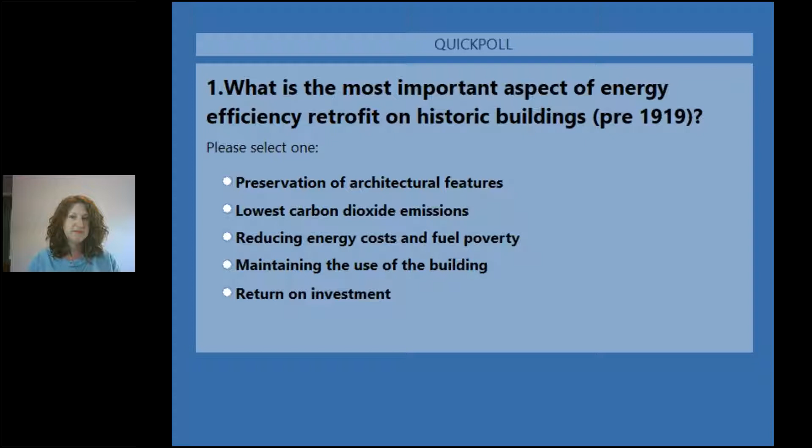And we should be getting the results for that fairly soon. There we go. Right, so you can see there, thank you for everyone that voted. Quite a split. The preservation of architectural features is the highest there, then maintaining the use of the building, and then reducing energy costs and fuel poverty, and return on investment is low. That's an interesting one to see there. I think that's something that depends very much on who's asking that question. So thank you for that.

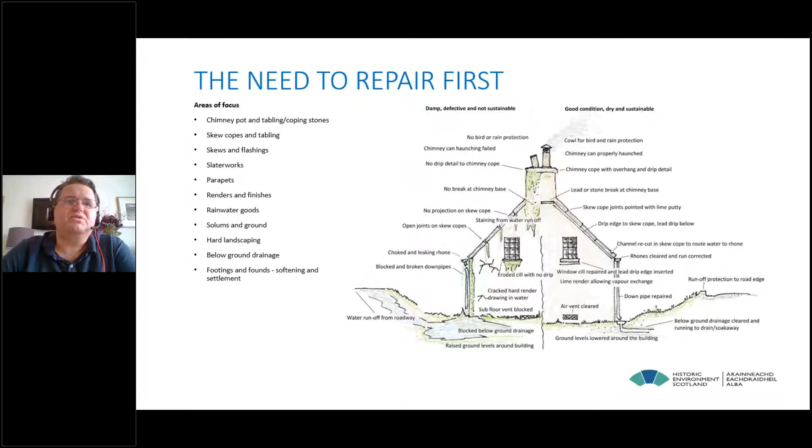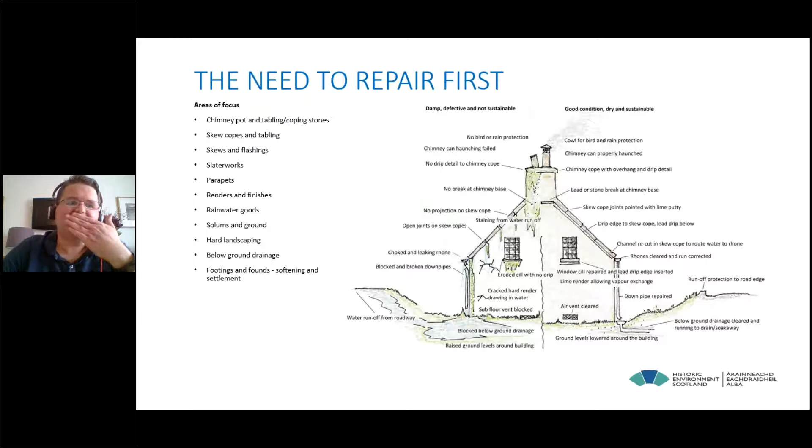So in short, regular maintenance would result in many expensive retrofit projects either not being required at all or saving a really good deal of money in those that are undertaken. So the takeaway from the talk today is to ensure that you deal with these issues before any thermal upgrading of the fabric takes place. And repairing and restoring the envelope is the first step in any retrofit project. And we'll just start by going down the areas of focus on the list on the left-hand side.

So chimneys. Chimneys are generally the most exposed element of a building, and by their nature, they're typically hard to access. Consequently, they're often neglected. Not only are chimneys exposed to wind and rain, but flue gases and combustion products deposited within the masonry over decades of time can accelerate the decay of the stonework or the brickwork. And this is exacerbated, particularly if the flues are no longer in use.

Now, the chimney cans, if you look at the image on the left-hand side, you'll see that the haunching washes out, it becomes cracked, pots become loose. Now, this is not only dangerous, but it's something that probably needs to be fixed fairly urgently. And you walk around Edinburgh and you look up and see some of these chimneys, and you just know from looking at them whether they're in a particularly great condition or not. You can see bits where things are growing out of them.

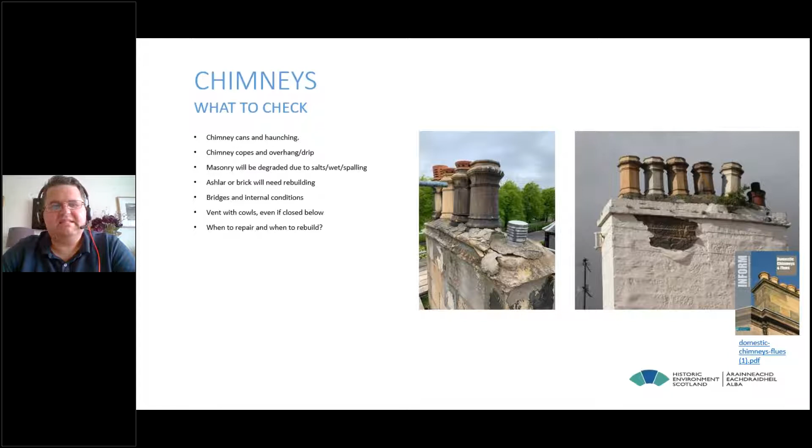So an important thing to look out for in these is the chimney copes. Is there enough of an overhang or drip? Is the masonry degraded due to salts, wetness, spalling? Does it need rebuilding? In any case, it's likely a chimney will need rebuilt every 100 years or so, but it's a problem area, and this is really the first thing when you approach a building, looking from the top down.

As we come down the building, you'll see things like skew copes. Now, these also face a high level of exposure. They're hard to access. Defects can go unnoticed, and if left unattended, these can often become critical.

These are there to protect the wall, the head of the wall. And if these don't work, then these can lead to progressive saturation of the gables, resulting in damage to the interiors as well as the exterior. But this also has a big impact on the thermal performance of the building. As we mentioned earlier, if the wall is wet, it's not going to perform as well thermally.

So there's a number of measures that are outlined there that can be used. You can cloak or half cloak the skew cope. Now, that's an option, but in my opinion, it does detract from the appearance slightly. In some cases, the skew copes can be rebedded onto a lead damp-proof course, and it provides extra protection against water ingress. Now, if this approach is taken, the copes will need to be secured in place with additional fixings to avoid slippage, and the edges of the damp-proof courses should really extend out by about 2 inches or so, just to give a good drip there to shed water.

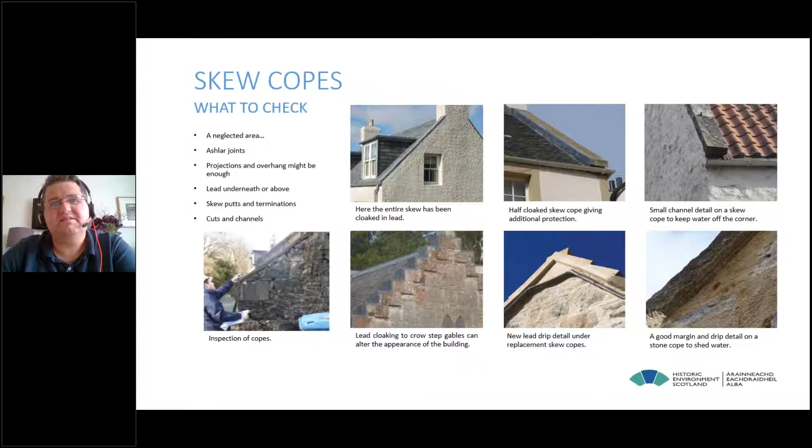But in many cases, just a good margin and a drip detail to shed the water is enough, and that's probably a preferable solution. And then we sort of come on to these parts of buildings, the parapet gutters. Now, these are a great trap for debris to build up. They're tricky to detail, and they do need a wee bit of thought. These can cause massive problems if left alone. So it's really important to regularly inspect them, clear them out.

So you see on the left-hand side, the image, there's ponding, there's a slate sitting in the gutter. It's clearly not been looked after for a while. Now, the intervention on the right-hand side was to install a new stainless steel gutter. The lead work was carried over the parapet, and a guard was installed over the outlet to stop debris falling down the pipe. But that's the repair if it's sorted, but if it's not looked after, these problems will come back again.

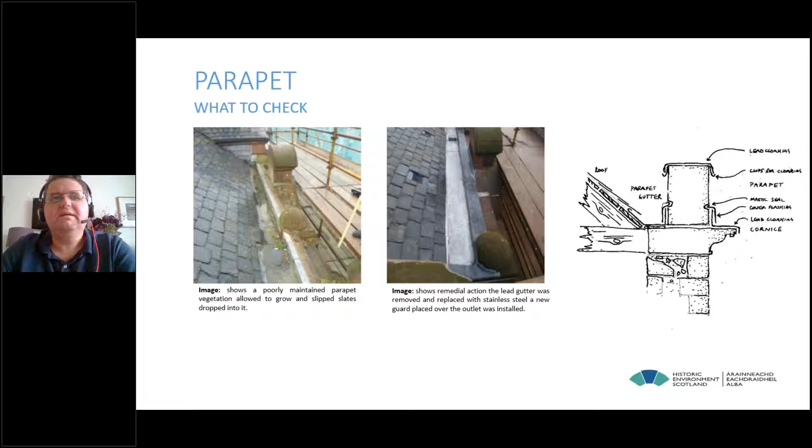And sort of moving down the building, we're onto roofs where many Scottish buildings have got roofs that are covered in a local stone or slate. Now, these small, thick Scottish slates were produced from a range of local quarries across Scotland. The material was processed and produced in a variety of lengths and widths, and it was laid in diminishing courses, with the larger slates at the bottom of the roof, diminishing to smaller slates towards the top.

Now, slates have got a finite life, but we know that this is a really robust material. The material will last for well over 100 years, which is quite common, depending on the type of slate and the quality of fixings and how the material has been laid. So we really are reliant on the craftspeople to help us understand these roofs. But similarly, regular repair is the best way to ensure that roof coverings will remain watertight and continue to perform well. So what you really want to be checking is damaged, loose, missing slates.

The amount of water that can enter by a single missing slate is fairly limited, but it's the problems of the local decay of the sarking board that follow that will lead to further loss of slates. So generally an annual inspection and repair is sufficient. Other things to do is just check the flashings are clear of debris, valley gutters and things like that. There's no bits of slate or cement in there.

Go into the roof space, check the fixings. Are they in good condition? Is there condensation on them? Is there moisture in the back of the sarking? Check for leaks in the roof. It may not be obvious from looking outside where there's problems, but if you go into the roof space, you'll get a better idea.

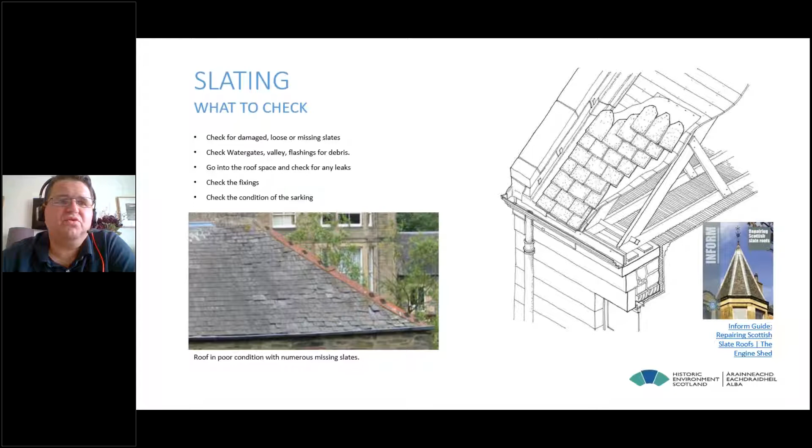And it simply just does come to a point. You'll see from the image there where there's quite a number of missing slates, and you might find that fixing these individual slates is no longer cost effective, so reslating may be required. Now, as a general rule, if you're talking more than 20-25% of slates are cracked, broken, or missing, it may be more practical to just strip and re-roof the building. And I would suggest using an NFRC approved roofing contractor if you're going to go down this route.

But there's something quite beautiful about a slate roof. I much prefer the lively tones of a traditional Scottish roof than the modern homogeneous roofing slates that we are importing today. We've got plenty of these roofs around, but they are being lost at a fairly substantial rate. The material hasn't been produced in Scotland since the 1960s, so we are relying on imported material, which, to me, just doesn't have the same appearance. It's not quite as rough or as lively.

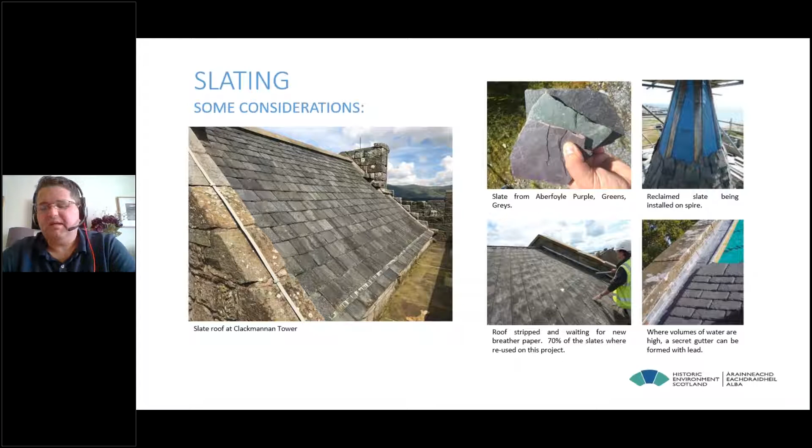So for us, the best way to maintain and preserve these roofs is just regular maintenance, again, a sort of annual check. You just go up and have a look at your roof through binoculars, and bring somebody out to repair it.

We get on to rhones and gutters, and these are a really important part of the building because they're the thing that carries rainwater from the roof, ensuring that the wall fabric remains dry. If they get blocked, they can cause a huge amount of problems with high volumes of water saturating the building fabric. Now, this is a serious matter. If not addressed promptly, it will result in damage to the masonry and finishes.

And it's one thing that I've noticed. If you go in any town centre or city centre, you look up and you see gutters with plants growing out of them, with walls that are saturated or stained, and it astounds me because you don't need to be a heritage or construction professional to know that plants shouldn't be growing out of gutters and water shouldn't be streaming out of walls just because the gutters are blocked. It's simple stuff.

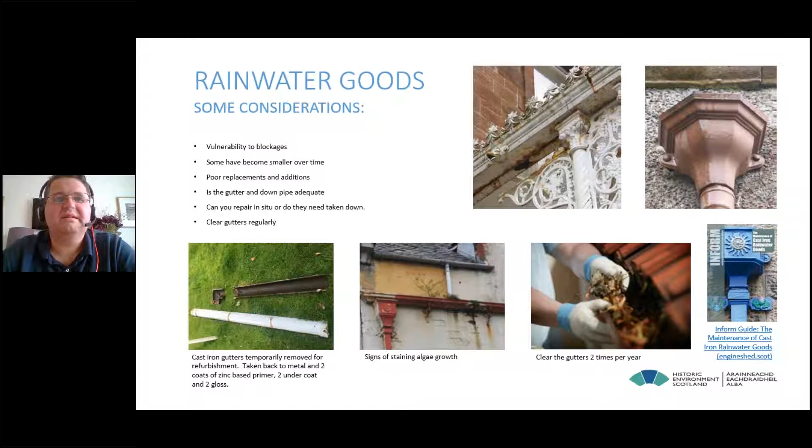Poorly maintained buildings are vulnerable to damp problems. However, with correct maintenance, repair and adequate ventilation, traditional buildings can be kept dry and healthy. You look at the image there, you might think that's a huge job to keep this wall dry. You've got your wind-driven rain to deal with, and then you've got the inside water loads of your showering, your washing and the vapor that we produce ourselves. So you've just got to accept that moisture is part of managing an existing building.

And how we manage the movement of moisture out of the building and out of the walls is particularly important. So we've got to ensure that the materials that are there can breathe. They allow for water to be absorbed and then released. So any intervention here really needs to be thought through, as it will impact the point that moisture condenses within the wall buildup. So I would advocate a really good understanding of how these walls work as a necessity before undertaking any retrofit measures.

If, for example, you install a layer of insulation on the back of that masonry wall, it will make the back of that masonry wall colder, which will bring the dew point further into the wall, which can cause further problems. But to address any damp problem, the source of moisture must first be identified and addressed before any interventions are considered. A lot of the work that I've done has simply been removing cement render or cement pointing from stone buildings and replacing it with lime.

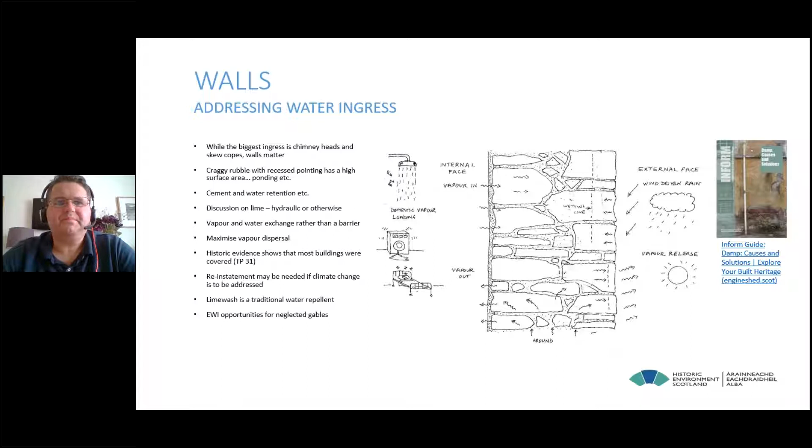And the other thing I would advocate is like-for-like repairs. So anything you're doing to a stone wall, you need to make sure that the materials are compatible with what's already there. And we'll touch on that a wee bit later on. And that kind of brings the question that we've been thinking about: to harl or not to harl. There's a lot of evidence to suggest that there was a lot more masonry harled traditionally than maybe we would think.

But lime harl and lime washing makes these buildings much more resilient to extreme weather. But how do you balance that practical solution with the fact that you're fundamentally changing the appearance of the building by installing a lime harl on a stone building? A lot of buildings maybe had this harl and it just became fashion. Stone became more fashionable. So it begs the question: do we need to go back to lime harling?

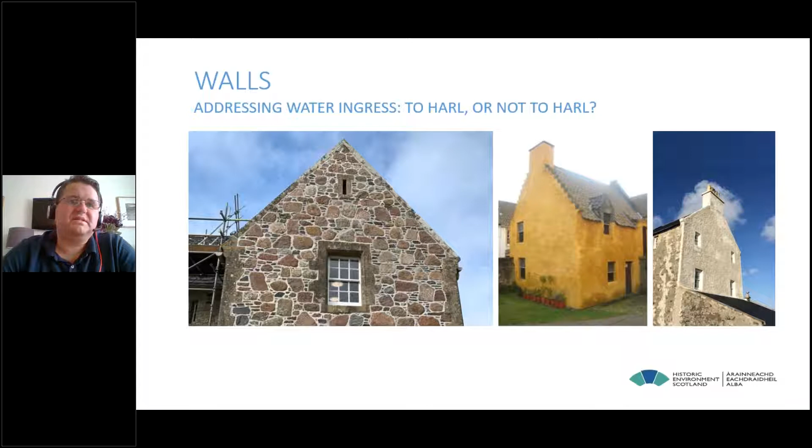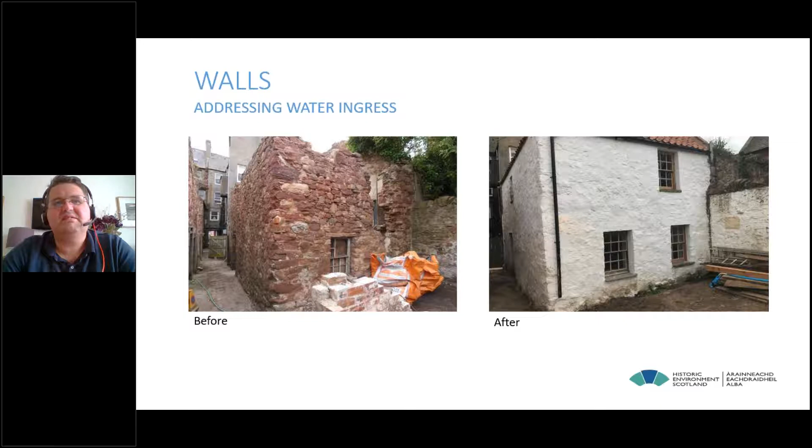If it makes the building more durable, it enhances the building visually, then perhaps why not? It's a technical solution. If it keeps our walls dry and it ensures the survival of the building, maybe we should consider it. And this is just an example. It's the same issue with building stone. Maybe this isn't a particularly attractive stone building, but I don't think the lime harl detracts from the appearance. I think it actually enhances it, and it's also offering a greater degree of protection.

We're starting to get our way down to the very bottom of the buildings, and you'll see a lot of traditionally constructed buildings have got timber floors and they rely on a vented solum. It's very important to make sure that there's adequate air movement beneath these floors, just to disperse water. And I've come across this in projects where I've seen so many of these vents covered, or the ground has been taken right up to them, which isn't ideal. So I think it's important to think about the ground level: has it been adapted? Should it be reduced? It may be practical to install a French drain there just to allow a wee bit more drainage to move moisture away.

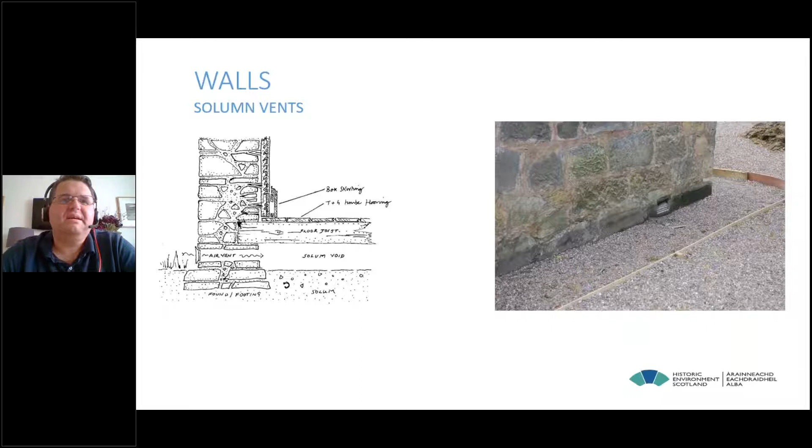And this one's pretty self-explanatory: below ground drainage, make sure your drains are clear. This is one thing that we probably do neglect. It's worth making sure that if you do see problems like you see in the image there, there's something going on, and you maybe do need to think about investigating it further.

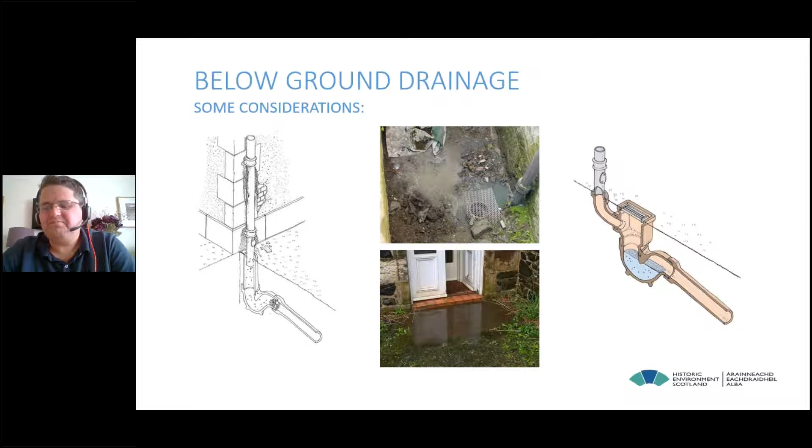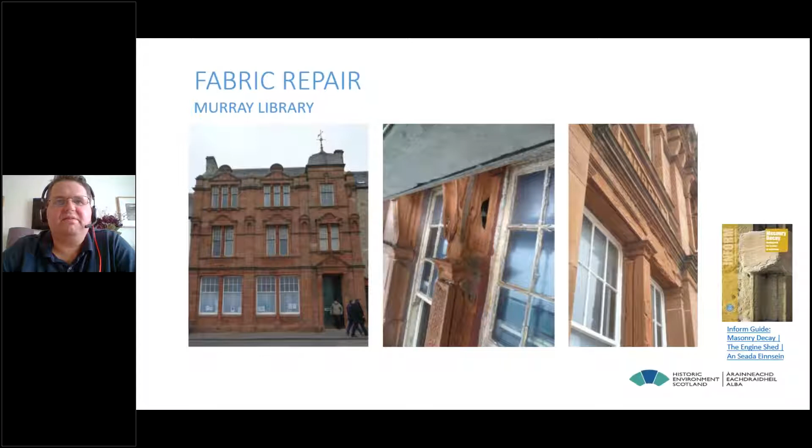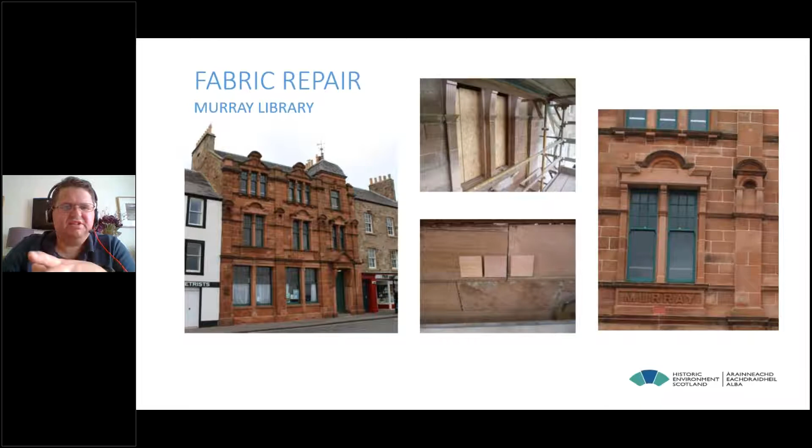Obviously, there's a risk that some of the stone could delaminate and fall onto the public, which is something that we had to fix. So, we had to repair the masonry. The approach was we brought in the British Geological Survey to take a sample of the existing masonry away and do a petrographic analysis. They provided us with a couple of potential solutions, and I think it was Corncockle or Locharbriggs that was used in the end, and you'll see in the image on the left-hand side the interventions are fairly clear to see.

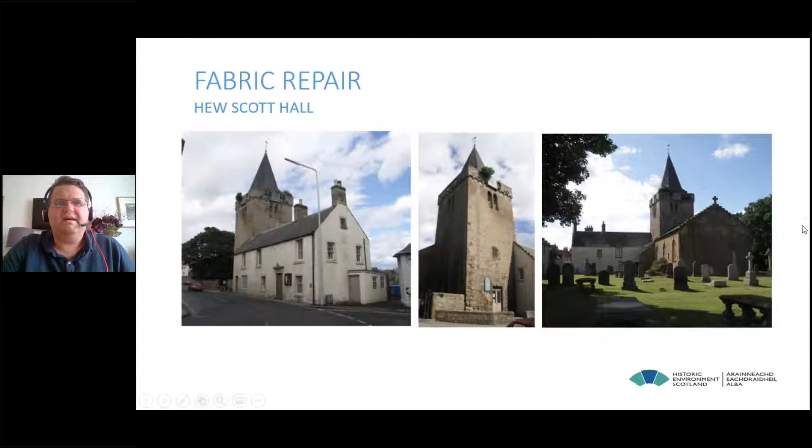This is a straightforward fabric repair of a project I worked on in Anstruther as well.

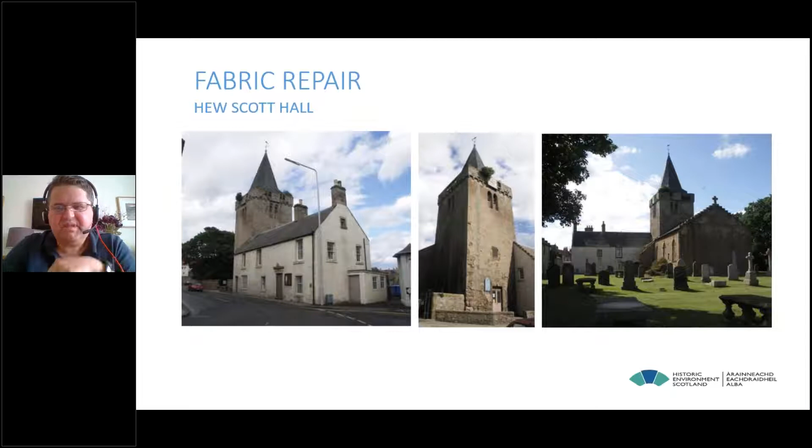It's a few years old, and it was in a particularly poor state of disrepair. There are several issues that maybe aren't quite clear. You can see from the medieval tower there's a tree growing out of it, and the parapet - the harling - is in fairly poor condition there. The town hall on the image on the left has got a cement render on it, and the roof was in fairly poor condition. So the further we went up the building, the more and more problems we got to see, which was because it was more exposed, I suppose.

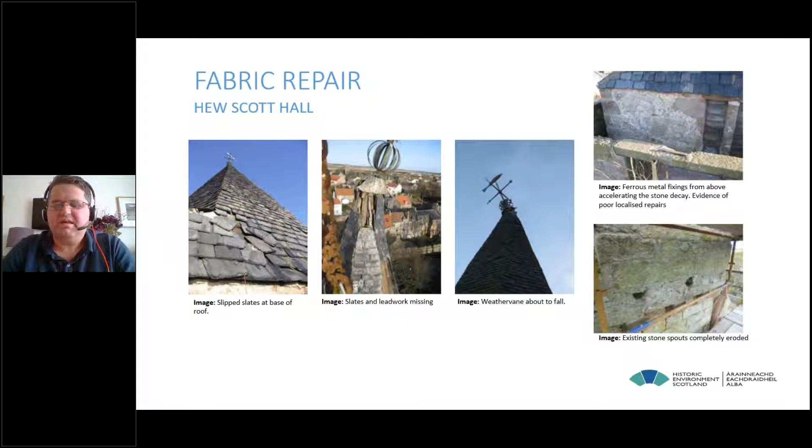What we had to do as part of this sort of 100-year repair was to clear the parapet, basically take it down, install new stone spouts, and rebuild it again. The cap house was given a lime harl, and several coats of lime wash, and that's the finished building on the finished parapet on the right-hand side. That intervention will help that building shed water. It deals with the defects of the eroded stone spouts, and that's it today.

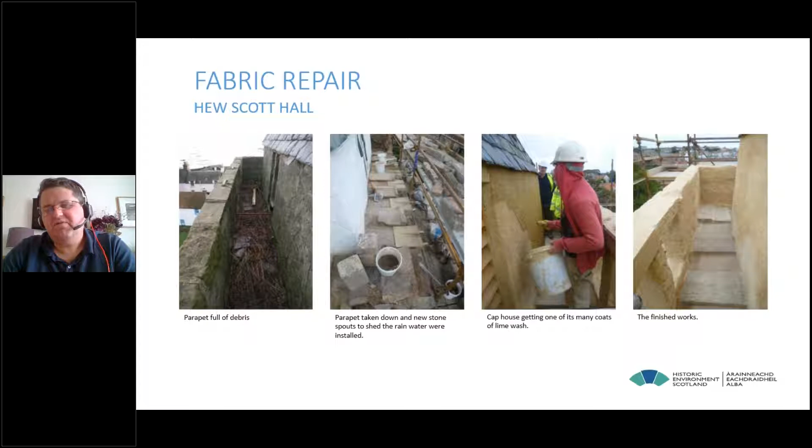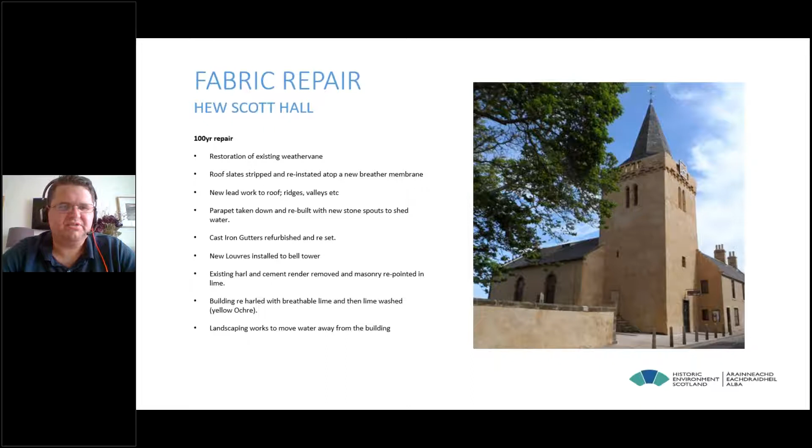This is your typical 100-year repair where that's what we had to do. So that building now, I would argue, is ready for a retrofit. You've dealt with the problems of the fabric, now you're ready to do a more deep retrofit on it.

I'll just be aware of time. How am I for time? Just two minutes left, Graham. Thank you, okay, okay.

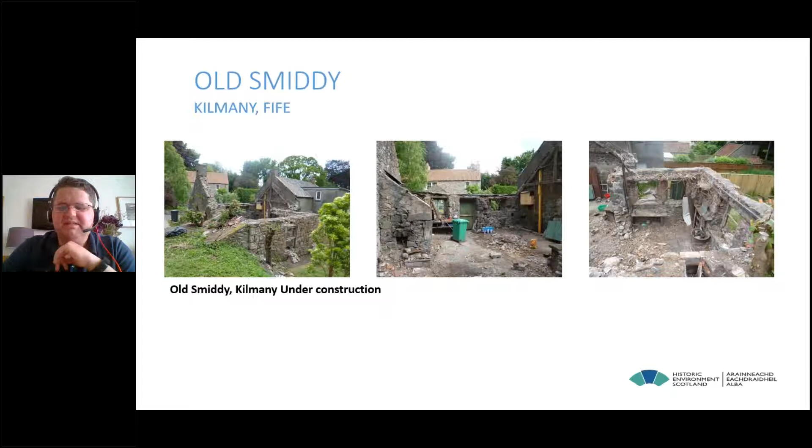The roof had to be taken off, but this gave us an opportunity to do a more deep and considered retrofit. We were back to sort of the very basics of the building, and that's it today - so it's now a home for somebody.

So I'm just going to run through very quickly the last slides. Careful, proportionate details, compatible in scale and craft to existing work, enhancement of performance, use an established palette of materials and techniques. Solutions in a tin are not our thing - each building is assessed on its merit. Listed building consideration, changes implicit in the listed building process, and reinstatement of traditional finishes.

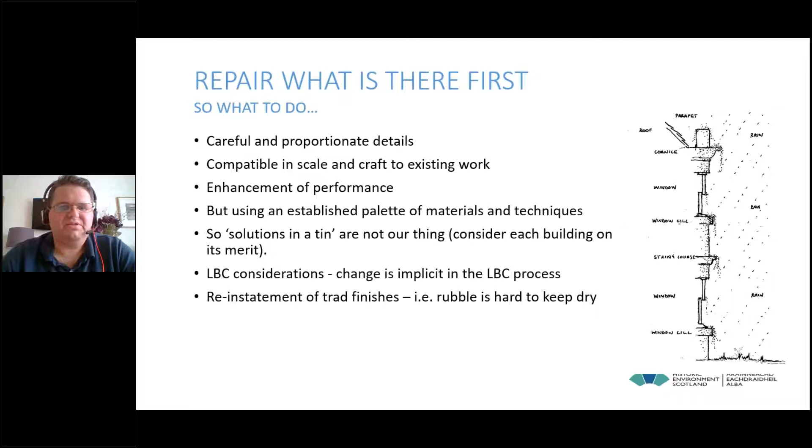Rubble's hard to keep dry - maybe think about what we can do there.

And it's just really my final thought. Most of us will have different job roles throughout our career, and I would imagine that most architectural technologists at some point in their career will encounter working with an existing building, either adapting it or extending it. I think architectural technologists are well placed to play a leading role in retrofitting traditional buildings, but we have to look at the buildings differently. These need to be part of the solution to climate change, not the problem.

It's important to have a good understanding around the issues, particularly around traditionally built structures. Understand the intervention you're proposing and the impact it will have on the existing fabric - is it appropriate, is it suitable? And always just fix what's there first. That's my final thought.

There are a wide range of publications from HES available on the Engine Shed website, and there'll be some links disseminated to you later on, but it's probably easier to find them on the website. Okay, thank you.

That was brilliant, thank you Graham. Really brought that to life as well. Really fascinating to hear, and the transformation in the Old Smiddy is quite something. Yeah, I was aware of the time so I wanted to kind of run through it a wee bit quicker. But that's really great to see, so thank you for that.

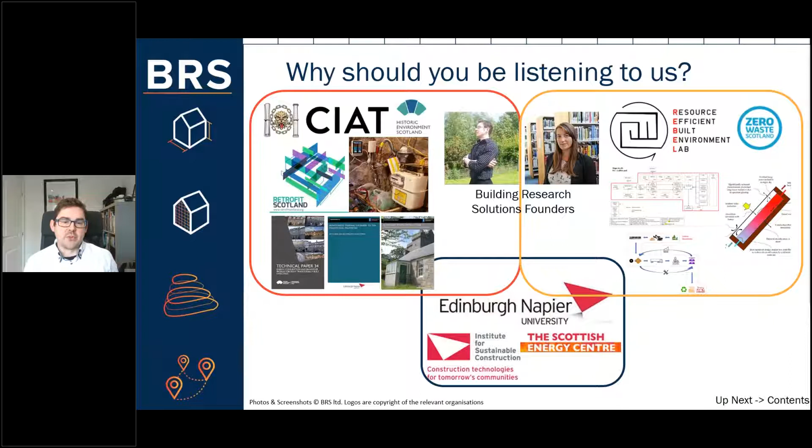And whenever we were a part of Edinburgh Napier University, we were also the founding members of the retrofitscotland.org knowledge base website. So first up, tools for designers and assessors of energy efficiency retrofit projects.

Now, U values, thermal bridging, control of condensation, moisture movement and air permeability, and also operational energy consumption and carbon dioxide emissions - these are the variables that I'm going to be including under the term tools for energy efficiency retrofit.

So many of you here today will be familiar with some of these tools by their software names, but it is vitally important for us to refer to these tools by their BSEN and/or ISO numbers, because there are lots and lots of software that claim to be for building physics but aren't designed to the overarching standards, so their outputs can't be readily compared across architecture projects.

Now, again, all of these are related to operational energy consumption and consequent CO2 emissions, and we'll cover standards and software for embodied energy and end-of-life solutions at a different time.

So there are many parts and subparts to these standards, and the various UK building standards and building regulations refer to many of these parts, but they also leave quite a few of these standards out of the actual text and simply make reference to SAP, RdSAP, and SBEM.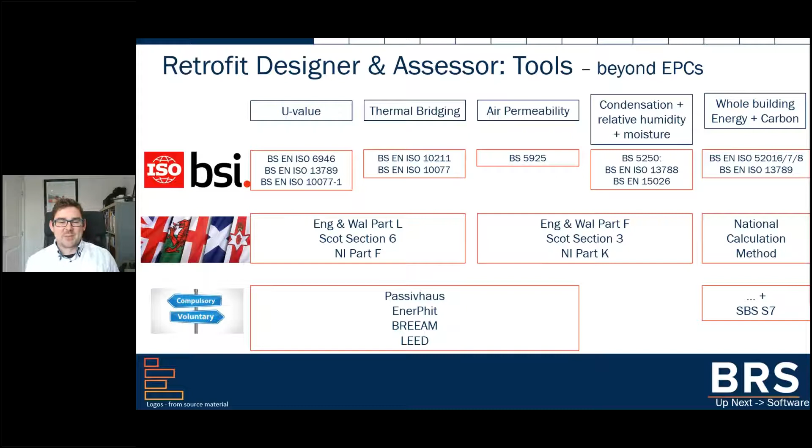Now, we also have various voluntary methodologies, approaches and standards, which include the Scottish Building Standards, Section 7 of the Scottish Building Regulations. Now, whilst I appreciate that's for new build, there are takeaways from that which can be retrofitted into a retrofit project that allows you to go beyond RdSAP and SBEM.

So under the same 5 performance variables, here are a range of the software common and used by us and other energy efficiency assessors to inform retrofit designs.

Now, this slide simply isn't large enough to include every available building physics software available to assessors and designers, but these are the ones that we know deliver to the standards on that previous slide.

So importantly, regardless of the software, we have 2 types of building physics tools, and I'm going to call them software as opposed to tools moving forward. Those on the slide with the blue background are what we call steady state calculation software, and those with the orange background are software that we call dynamic simulation software, or often DSM for dynamic simulation modeling.

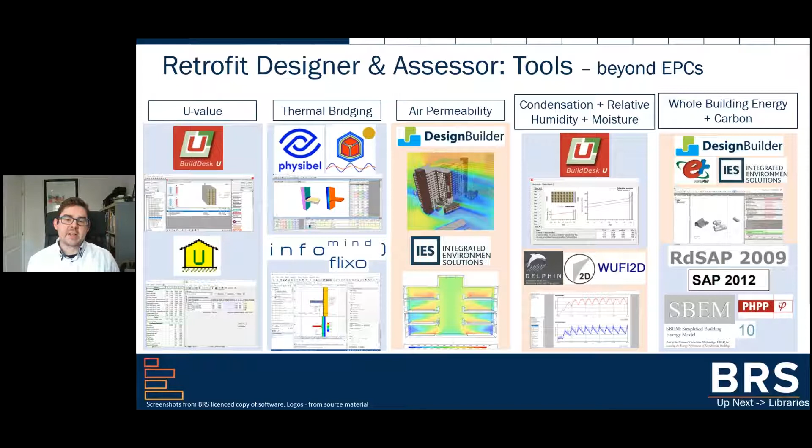Now a word of caution with all these softwares and tools - a message for designers and assessors of energy efficiency retrofit works. The more complex and dynamic modeling software, with capacity to simulate over many years using hourly weather files and climate data, is not always better than simpler numerical steady state stuff. In many ways they are better, but without the right input data in the form of libraries, dynamic software can be simply worse than useless. If you don't have the right input values and you're using proxy materials and proxy locations, your uncertainty and margin of error for these outputs will be huge, and some of the numbers you're using to help de-risk will be misleading. So if you are investing in dynamic software, or people doing dynamic simulations for you to de-risk a project, local libraries are key and must be linked to your specific location and supply chain. Using proxy materials does not de-risk your project - it can increase it.

So for us, it is quite scary at the moment with all the talk around design for retrofit, just how many training courses are cursing the virtues of the software without doing proper due diligence on which software have, by default, weather files and materials from the UK. Now, there is a fine line and a balance to be found between steady state numerical calculation software and advanced dynamic software. For modeling purposes, it doesn't need to be a case-by-case basis, because that would burden mass retrofit, but it does need, as Graham had said, for the real world stuff, an archetype by archetype approach. The differentiation of archetype needs to be set by the building's original strategy for controlling excessive water and indoor air quality.

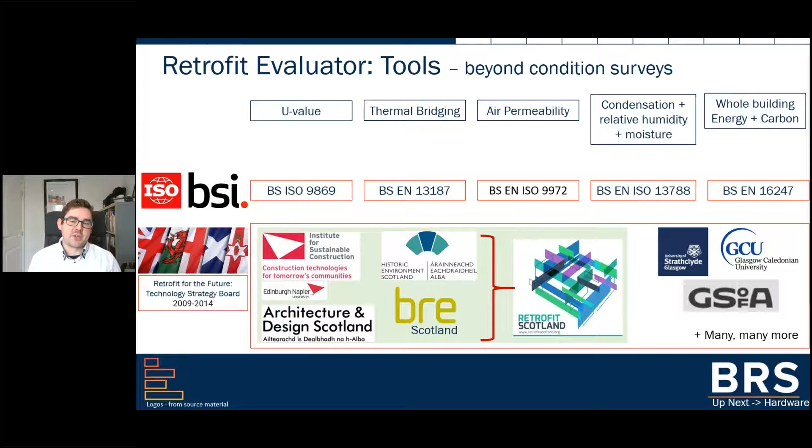For us and our retrofit research partners, this was born from years before, during, and after the TSB's Retrofit for the Future funding mechanism, at which time many of us had advocated the role of retrofit evaluator to be defined and recommended. Now, importantly, regardless of what training course a person went on or the variety of calculation or qualifications they have, you need to ensure that the monitoring and measurements are being carried out to a relevant BS EN and ISO standard. That's key. And in instances where the standard doesn't exist, a person's experience and scope of their methodology must be checked and must be challenged.

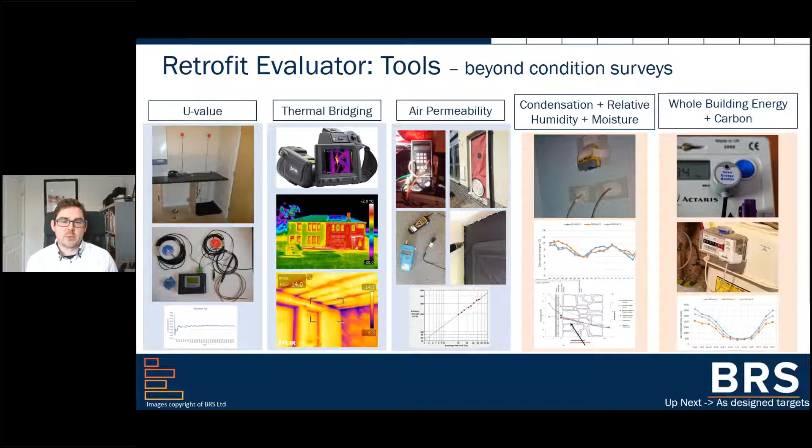Now, another cautionary message for those who want to evaluate an energy efficiency retrofit project. Replicability and comparability are paramount for what you're going to be capturing and evaluating. This includes the calibration of your own equipment, placement of the sensors, the error and precision of the readings, the sampling rate, etc. So with or without a BS EN ISO standard, the monitoring regime must be consistent and robust to cater for a range of archetypes that you are and will be working with in the future.

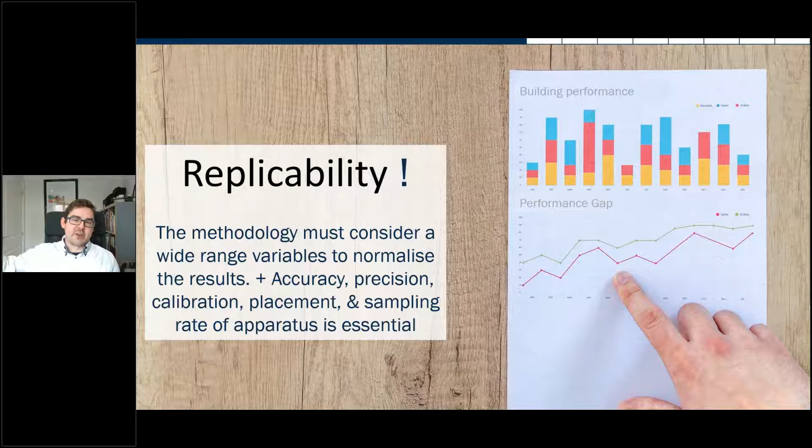And without that integrity, the benchmarks and databases that you want to create will be flawed, and you will be increasing the risk there. So it's very important with evaluation hardware that you have a consistent standard, either a national standard or your own in-house standard, so that your data can be comparable.

Then using the in situ baseline data as input variables to your assessment software allows you to calibrate your models. So even if you're using the steady state stuff, the in situ data that you capture will help you to increase the accuracy of your results and can reduce that risk and the error in your assessment. Then after the retrofit works are completed, you repeat your evaluation. This means you have 3 data sets, and you can then performance evaluate your work. But also, and somewhat more importantly, it helps you define those benchmarks and those libraries to help de-risk the next project.

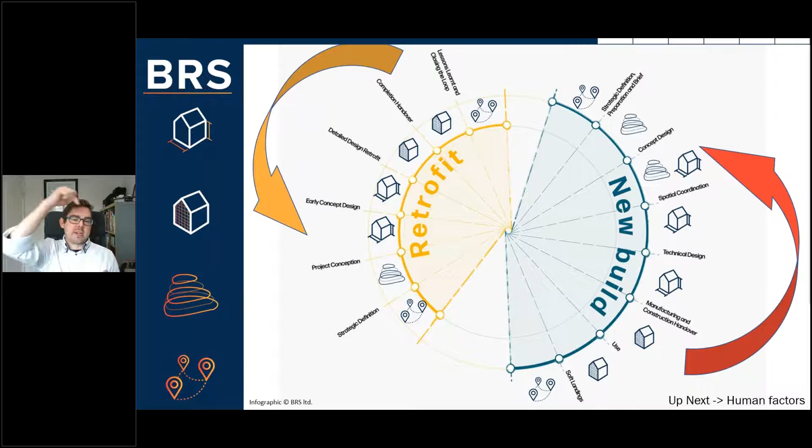And the more you do that on early projects, the less you have to do that on future projects, because there is to be defined a matrix of different archetypes, different ages, and different intervention measures. And there is a streamlined way of doing it. You just have to get a better appreciation of how to calibrate your assessment software.

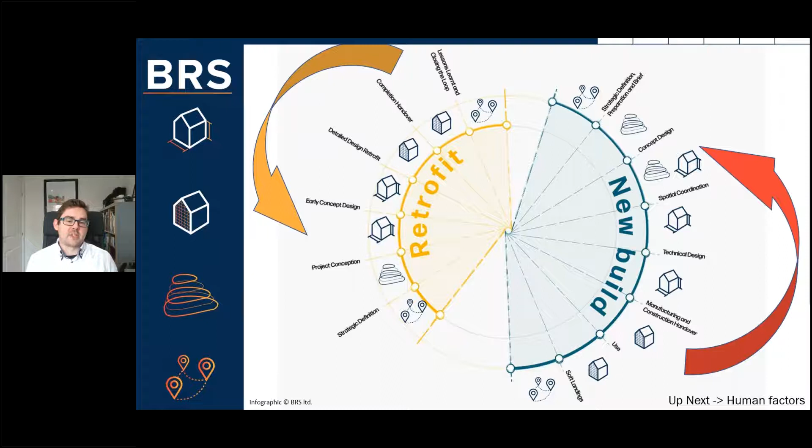So next up, and towards the very end of the presentation, I want to talk about human factors. There are 2 points I want to make here: one about going beyond questionnaires and surveys, and the second, taking a leaf out of the new build book of quick start guides. But first off, surveys in the form of questionnaires and focus groups, etc., and other qualitative metrics are often leaned on too heavily to define the impact of a retrofit project. Then people start getting bogged down with the erroneous term rebound effect, and fuel bills are leaned on way too heavily to define the impact of a retrofit project.

Now, whilst there is a place for qualitative data and fuel bill data, it needs to be normalized, and thermal comfort measurements are a good way to do that. This gives you the values known as predicted mean vote, which is used to predict the percentage of people dissatisfied. And it's a surprisingly useful yet underused statistic.

Moving on to the Quick Start Guide part of this point, many of us will be familiar with the Scottish Building Standards Section 7 Quick Start Guide. Glasgow School of Art produced the first written version, and then when I was at Napier, I produced the first video version, because videos are often better for conveying complex information.

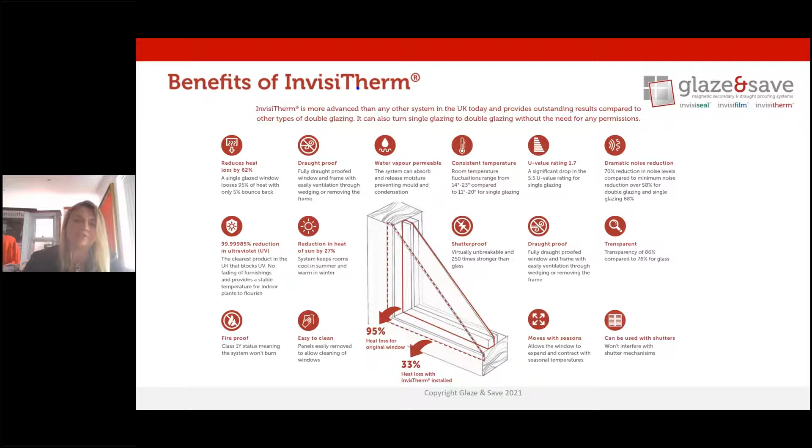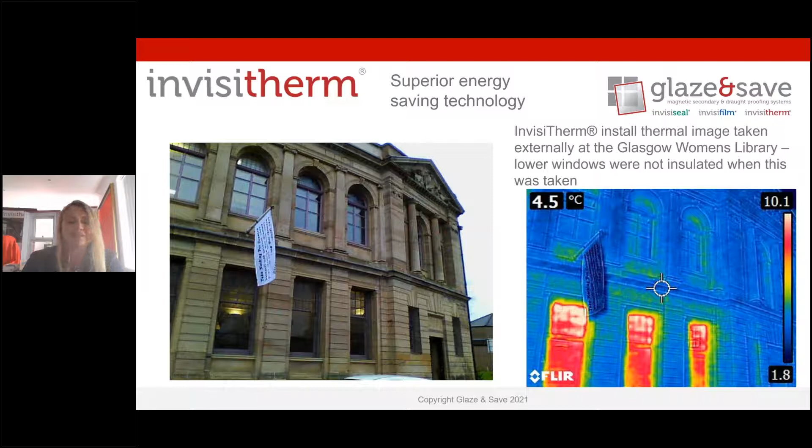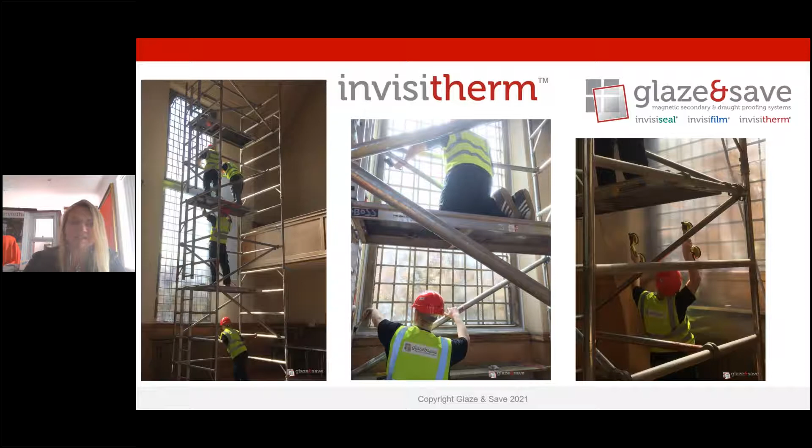This is a church install here. We're showing our skills of being able to install very large systems, and there I am in front of them there. So basically in the last 7 years we have developed installation processes to go over any single glazed window of any size and shape, and anything that's required that way.

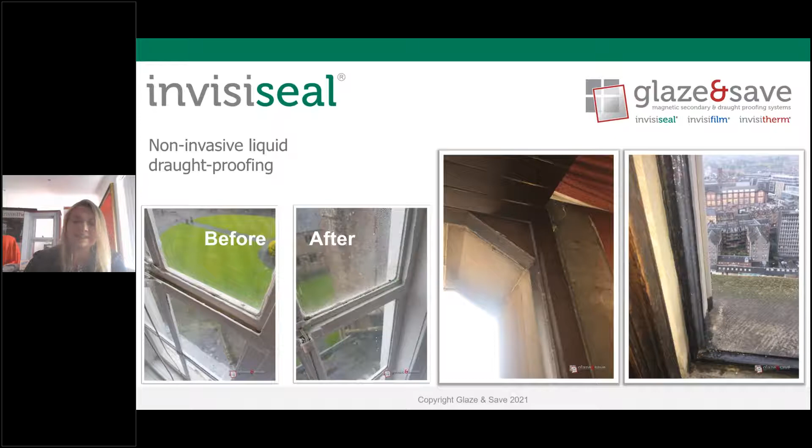So our free survey process, this has been a real challenge for us as a business, and it's good for me as a business leader to chat to you today and give you another perspective on what it is actually trying to make a company in this market, and how do we retrofit and all the challenges. So we now have to do a survey in 5 parts. A window survey to actually work out where InvisiTherm would sit and work out a price.

The window health check to see 17 points of a window, a typical sash and case window, to check that it is in a good state, and if not, what advice we would give. The systems presentation is just so the client actually understands InvisiTherm, sees it, holds it for themselves, and thermal image survey to actually have a look at any thermal bridging and problems that may occur, and then property condition survey. And this is really due now because of the climate impact. And we never used to do the latter two initially, and we're having to now because of the conditions that we're now facing, which I will show you in some of our case studies.

So what we do when we educate our clients, and we have to educate the clients, it's not a case of they're just buying from us, is we talk about U values and we explain the thermal transmittance of the U value. With the U value, we talk about the radiant surfaces, the temperature, the increased thermal comfort that we can then achieve, and it gets them to understand what their house is all about. And we really do get engagement from them.

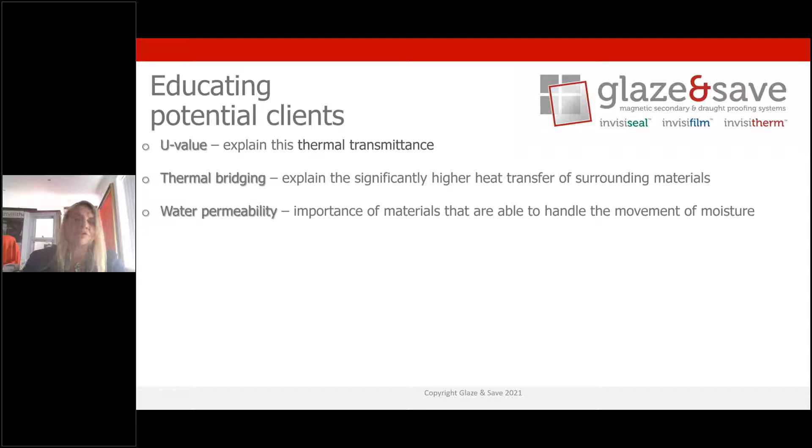Thermal bridging, and explain the significantly higher heat transfer surrounding any fabric. Water permeability, the importance of materials that are able to handle the movement of moisture. Now this is a problem, well not a problem, a challenge for us. Our product must breathe, it must be water vapour permeable so that it enables moisture to travel through and is not trapped.

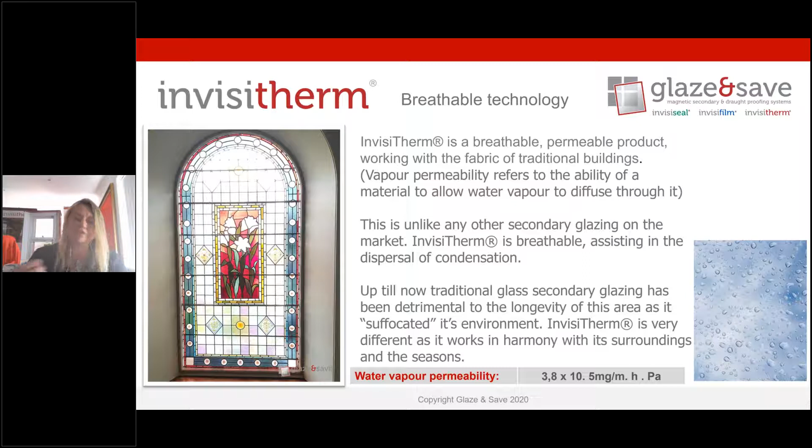But equally at the same time, if we're putting it over a window that is not stable and has got an issue, then we will draw in the moisture. So it's a good health check in itself. It lets our customers know that the window is not stable, but we need to find that out before we do the installation. So it's made another layer for us.

So we also talk to the customer about ventilation and air quality, and we explain the traditional build air movement and modern pollution challenges such as traffic canyons. Now, with the condensation and relative humidity, we also loan a free dehumidifier to any of our customers for 3 months so that they can engage with the moisture levels in the home.

We are finding, especially in the last sort of 3 to 4 years, that our clients are coming to us and saying that we're freezing. We've never felt this cold before in our home. Our heating hasn't changed. We haven't changed. And what it is, the moisture levels within the house have been getting higher and higher. So I would love anybody out there that wants to help us to do some more research on this, because there's something going on. And the vast majority of our clients buy the dehumidifiers from us because they find that they need to reduce the levels of moisture within the home.

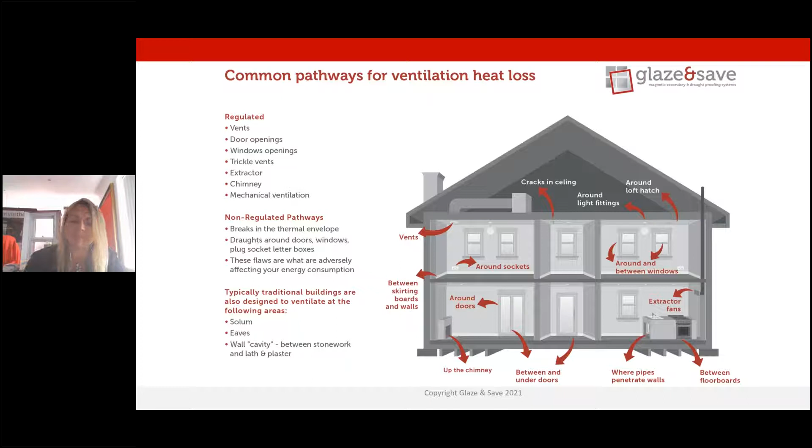We also share ventilation and heat loss information. So this is a plan that we share with our potential clients about all the different ways that the air can come into their home so that they can understand the airflow, because it's really important to make sure that that is maintained during any retrofit that's going on.

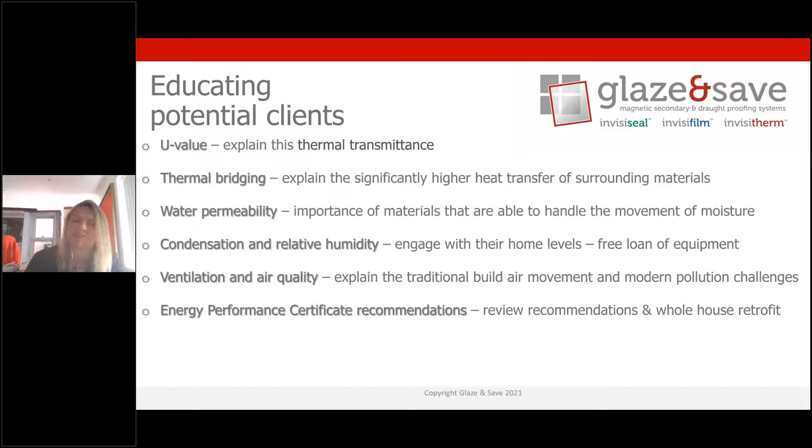And we also look at the energy performance certificate, and we make recommendations on whole house retrofit and not just our product. If the loft insulation hasn't been carried out, for example, that really has to be done first before the windows or in conjunction with that, as one example. Scottish Government funding is available and we let our clients know how they can apply. And right now, Zero Waste Scotland for commercial buildings has a 30% grant on our product, which is fantastic.

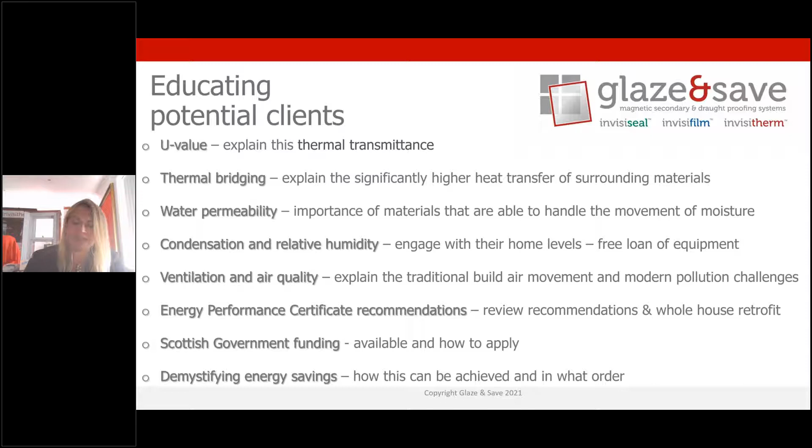And we also demystify the energy savings. Now, this is my background prior to taking on Glaze and Save. And I've talked about this for many years and the stages that you need to go through in order to achieve net zero or a path to energy saving. And there's a behavioural change, which is well documented, and I know John Simpson knows an awful lot about this area. Low cost, easy solutions, which are simple.

Well, behavioural change, by the way, is just simple things like closing the curtains an hour before it gets dark. It can actually keep 2 degrees in the house. Moving your headboard from an external wall into the room, or changing the setup of the room. They don't cost anything, but they actually can improve the thermal comfort and your overall utility consumption. Your low-cost solutions are simple things like radiator reflectors, some draught proofing within the house around exit doors.

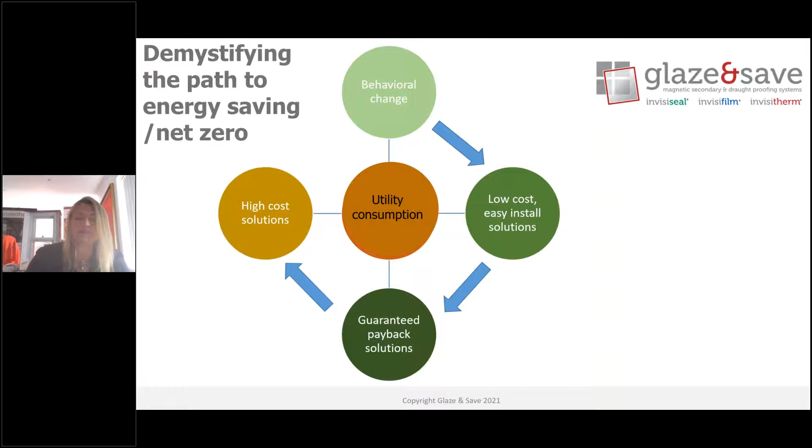And then you move on to guaranteed payback solutions, and then you look at the high-cost solutions. The guaranteed payback, Invisitherm comes in under that. Over a period of time, the product will pay for itself. High-cost solutions are things like air source, ground source, that have a much higher outlay. Now, we've added this in. The home must now be watertight before you go to the stage that we're now wanting to install. And this is new advice that we're now sharing, and this is why I'm speaking to you today, to share why we're saying this.

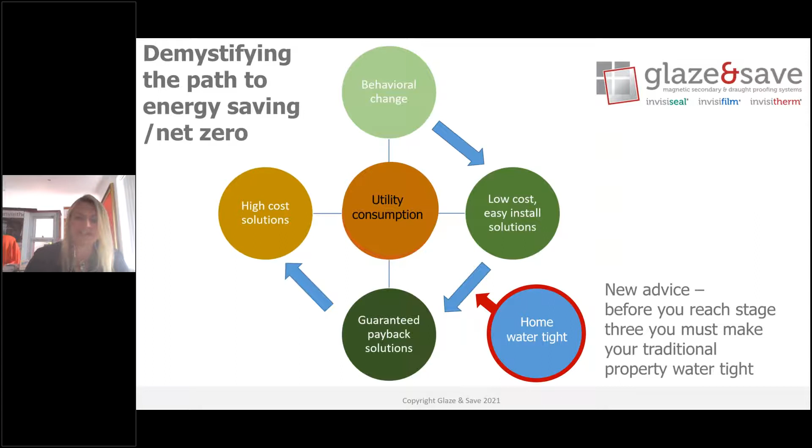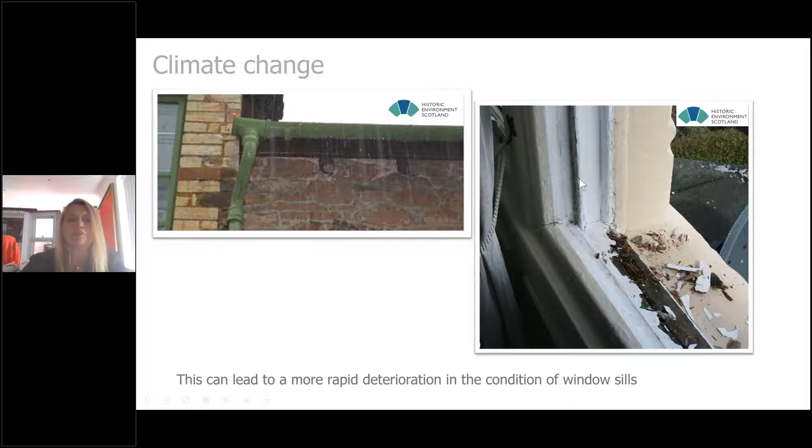So as Graham alluded to, climate change is here and now and happening, with a dramatic effect. And we are seeing a lot of the gutters that are just not able to cope with the water that's coming down. The downpipes are blocked or simply not big enough. The water is overflowing and hitting onto the windows and having a big impact on the condition of the windowsills.

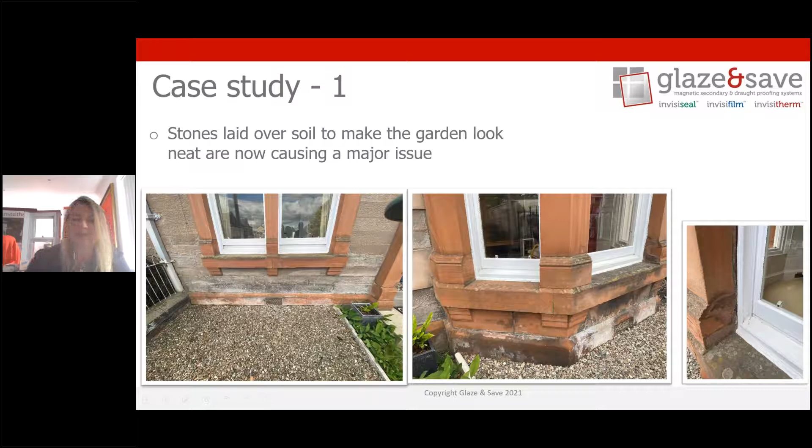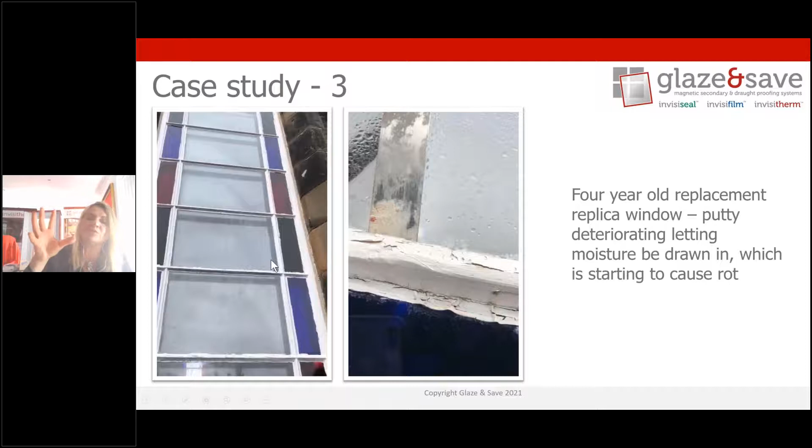And again, this is a 4-year-old window in a church that was replaced. And they said to me, oh, there'll be no problems with any of the windows. And as you can see, InvisiTherm is drawing in a lot of moisture. All the putty is coming away. And it's a very exposed window out of all the 6 that we installed.

Another case study here, and this is a 5-year-old hardwood window. It doesn't look too bad. It looks like it just needs a good paint. But on closer inspection, we found that there is really, really bad rot. And if you look above, you can see just a small drip that must be hitting the window every so often, and it's causing the problem.

But the good news is you can patch repair this, and apart from fixing the rhone to stop it from happening again, you can also use long life external paints like Demi Dekk, that will give you a guaranteed 12 years. So they don't have to be a burden in the future.

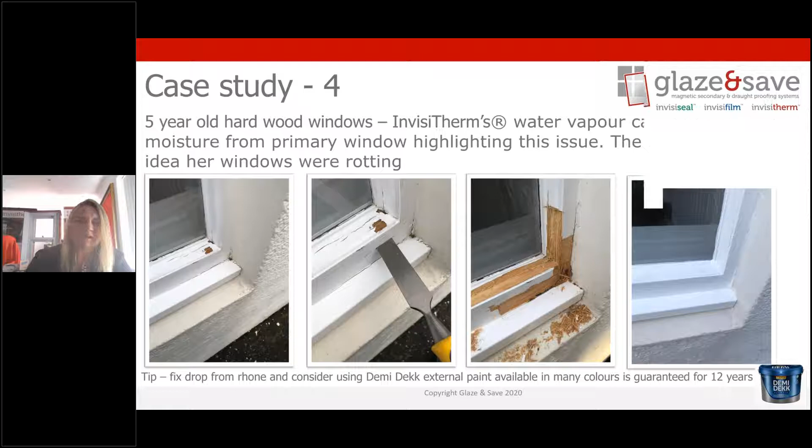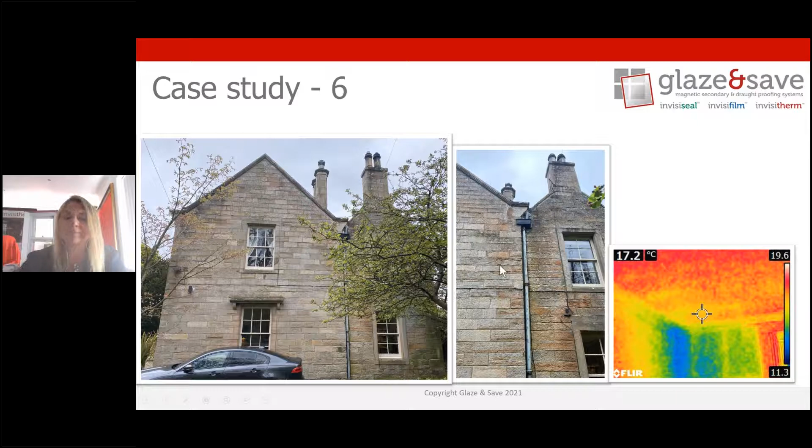And on the side of the house, I found with my thermal image a very damp patch, and it's very evident when you take a step back. You can see that this rhone and this downpipe is all blocked. And yeah, it's quite frightening. And this is the side of the house. Now, he was aware of this because he was told this room had slight damp, but he was told just to cut back the trees, and nobody actually noticed that the ground level is getting higher and higher. And also that downpipe doesn't quite go in properly. This all should really be changed. And you can see that the bounce back is actually starting to erode all the stone around this area.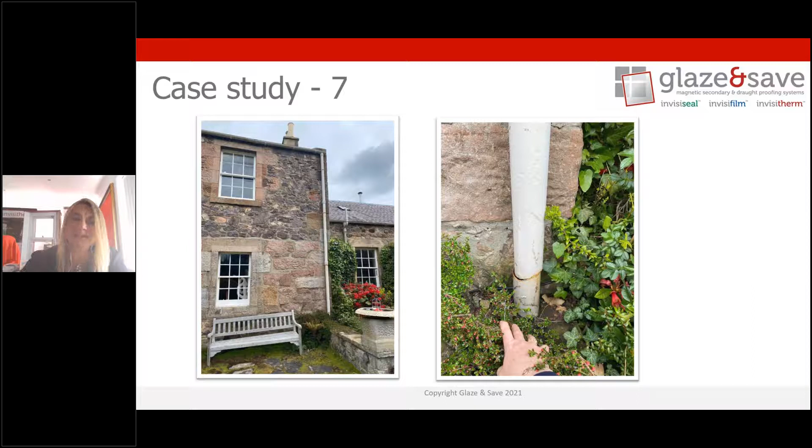This very shallow gutter and downpipe is expected to take all this water. The most shocking one of all is their main downpipe—it's not even functioning properly, and all this moss is caused by the water gushing from it. It's been soaking into the property, and luckily it's not at window level yet, but it is impacting the thermal comfort of the home, and it's starting to erode some of the stonework, which is really sad to see.

Now, case study number 8. This block is a factored building, quite large, that was converted a number of years ago. When we were surveying the property, I noticed quite a number of things on the thermal camera, and they said, 'Oh no, it's just had the scaffolding up last year, everything's done, it's hunky-dory,' I think was their words. And I thought, don't think so.

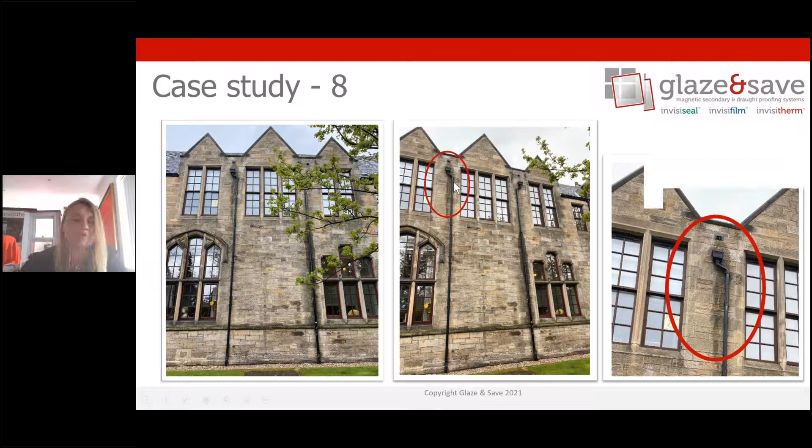So I went outside. First of all, you can clearly see the water isn't going into the hopper, it's actually soaking into the stone, and the camera picked that up straight away. Also, the second downpipe is leaking, it's blocked at the bottom, and it's got plants growing out of it. Scarier still, the pointing wasn't done, and with this water coming down, and probably the wind blowing, plus climate change meaning these windows are getting hit with a lot more moisture.

You can see this window in particular is already starting to feel the effects of the excess moisture, and the paint that was put on less than ten months ago is already coming away. This gentleman was absolutely shocked, because he felt he'd paid good money to have his building maintained.

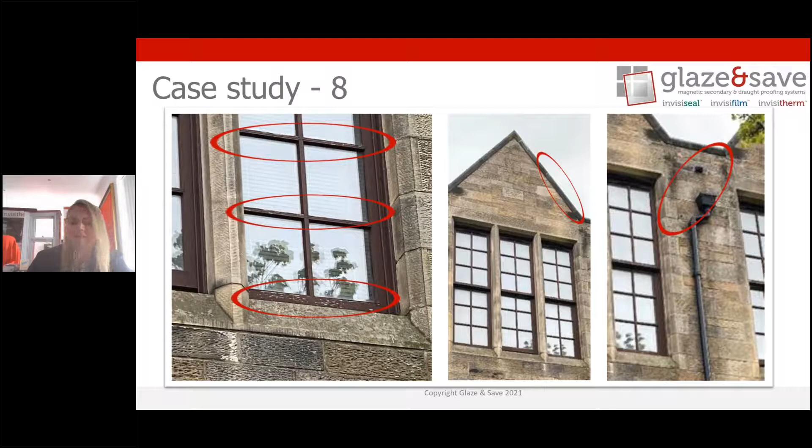Case study number 9—I wanted to show this because of what Graham said earlier, so I've added it in. You can see the stone building, rather than sandstone, but you can see the actual moisture from the thermal camera coming all the way through. That's from previous plant fixings, and shows how much moisture can actually soak into the building itself, just like Graham's diagram said.

So when we're going out with our thermal survey, we're bringing to life exactly what's happening within the house and really engaging the clients with what's going on.

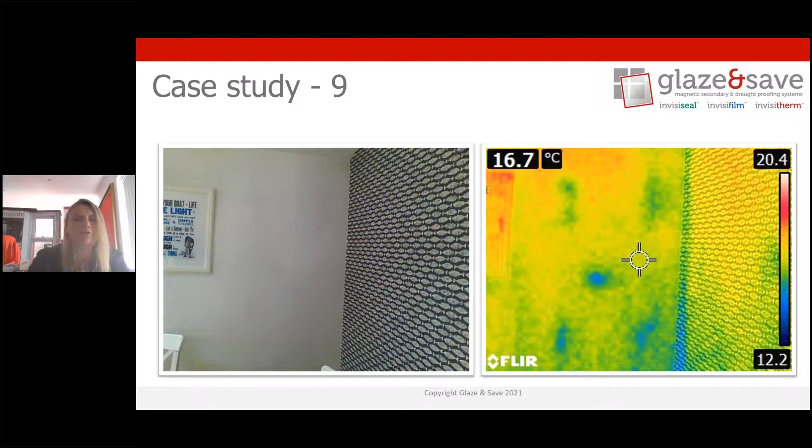This home was only purchased last year, and at no point was the homeowner told that all his downpipes were soakaways, that there was no drainage at all. We found the whole base of the house to be terribly, terribly damp.

When we looked at the side inspection, as well as the soakaway, we found tarmac had actually been put right along the street next to the home. This means the moisture now runs straight into the stone, unable to soak into the ground as it would have done previously. We also found his vents were blocked up.

When he bought that house, it was given a clean bill of health, and he was unaware of any of this until we came along with the camera.

Sadly, with the windows, you can see the water penetration coming down, dripping over this downpipe, which I think simply isn't big enough now to handle all this water. The window itself is starting to rot along the bottom sill, but luckily we're catching it in time, so it will be able to be rescued.

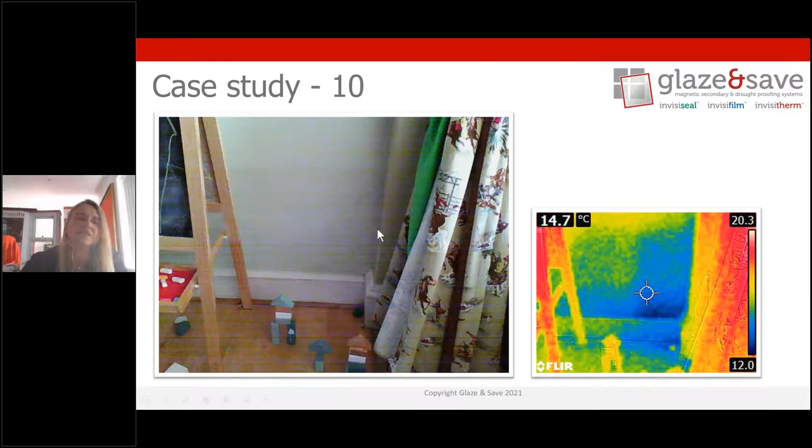That's inside his lounge, and you can see very clearly the damp coming in.

Now, why is this happening to the property owner? Is it ignorance of these major issues? I've been racking my brains, especially over the last year, as to why this is actually happening, so I'm glad to have an audience today to put this to. When it's a newly built property, they're confident in the sales report—do you think that's why it is? Do you think it's about concentrating on the internal aspects of the home first and not looking outside, being so desperate to get the kitchens, bathrooms, furnishings and paint right?

Not sure—relying on existing tradesmen to highlight and fix the issues. We outsource everything these days, from dog walking to ironing. Do we think that everybody we hire is then able to fix the problems for us? There's a lack of understanding among tradesmen prepared to work on traditional buildings, or limited understanding of the climate change issues we're now facing, and fast.

Timber preservation companies aren't always advising correctly on the source of the issue. I've done some research before speaking today, and they have it in very fine print that external landscaping should be considered. I've asked landscapers if they've ever come across these reports, and they wouldn't have a clue how to start. So there's definitely disconnection with everything.

Lots of roofers are fixing the gutters, but they're not looking at the blocked drains below. They're quite happy to clear what is seen, but not actually looking for or mentioning that there are other problems there.

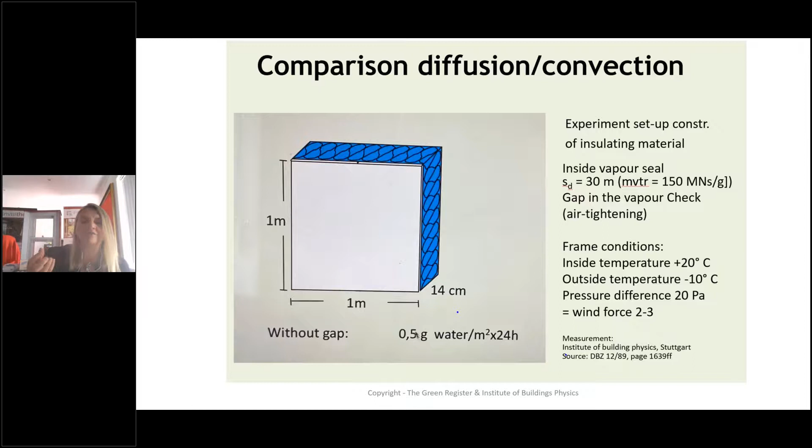Now I wanted to end with these last three slides and talk about why I feel this is a really big issue. If we look at this slide from the Institute of Building Physics, you can see they've done a test of a typical insulating product that's vapor permeable. With no errors in the installation whatsoever, or no issues with the environment around it, it will draw in 0.5 of a gram of water. With just 1 millimetre of a gap, it draws in 800 grams of water.

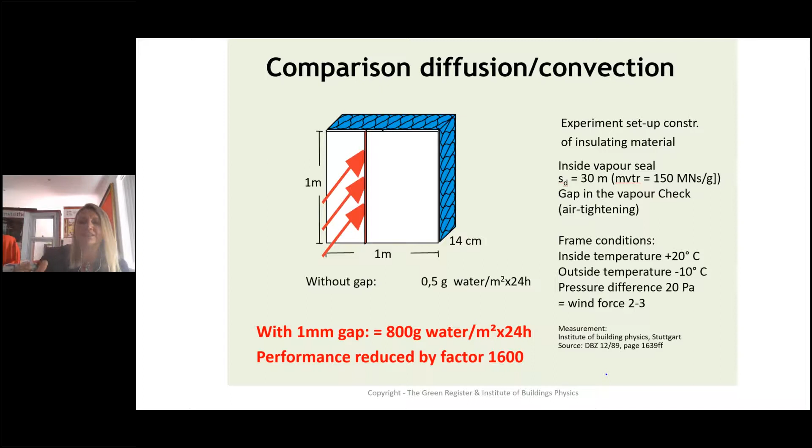He really drove home that we need to repair before we insulate, and insulate before we generate. That is the message I'm leaving you with today. So thank you very much for listening.

Excellent, thank you for that, Tanya. Really interesting—I know we'd spoken before the session today about some of the case studies you were going to show, but some of those were astounding, and the fact that they all just happened in the past two and a half weeks as well is incredible. That was why there's a lack of thermal images, because they don't really work at this time of year—sorry about that. No problem.

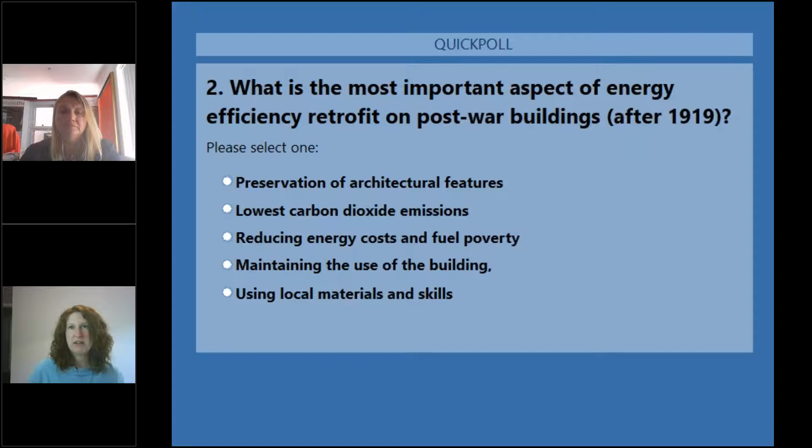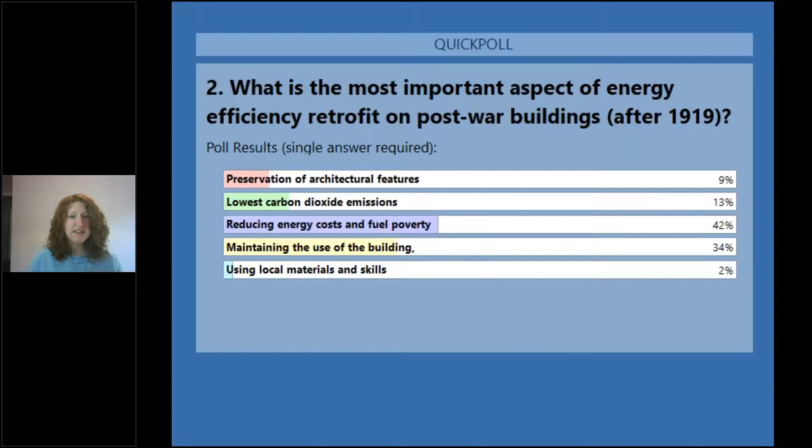So what we've got here, again, is reducing energy costs and fuel poverty. It's a bit different from the first one, where preservation of architectural features was scoring much higher there, and maintaining the use of the building scored high on that one as well. So thank you everyone for that.

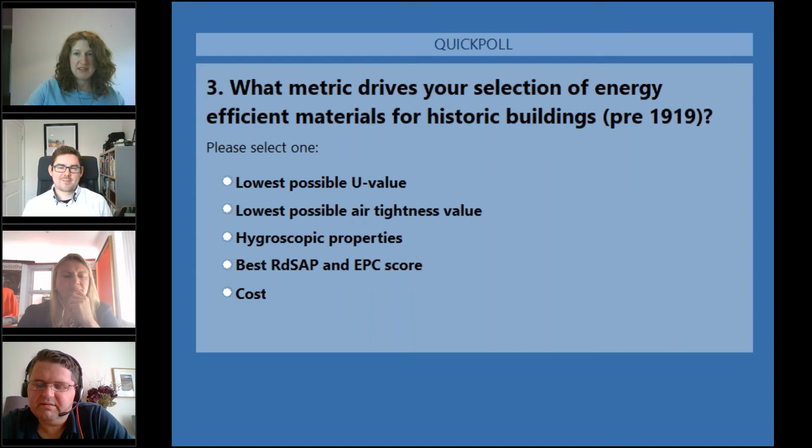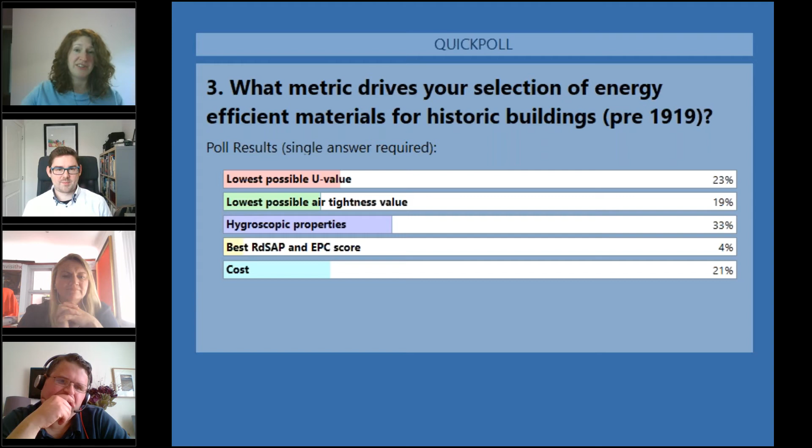So just to finish off, I think we've got one final poll coming up. Is that right, Danielle? Yeah. We just want to know what metric drives your selection of energy efficient materials for pre-1919 historic buildings. Is it the lowest possible U value, lowest possible air tightness value, hygroscopic properties, the best RdSAP and EPC score, or is it cost? We'll get the figures up for that in a minute. Also quite a spread there. That's interesting to see. Hygroscopic properties doing very well, as is lowest possible U value, and cost is clearly a factor as well, as with most things.